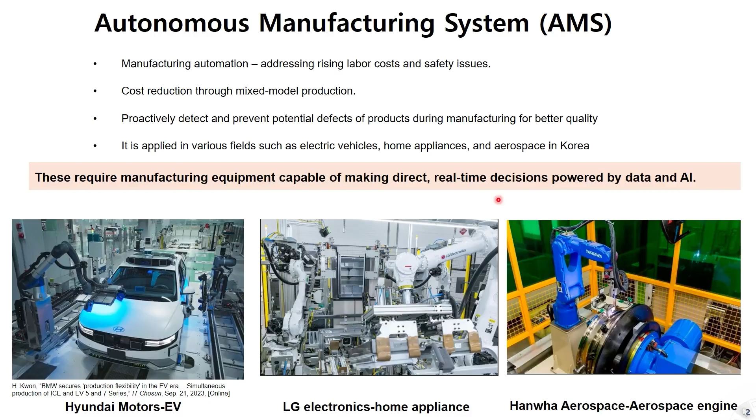Before going into details, I would like to briefly discuss the difference between a smart factory and autonomous manufacturing. Of course, depending on how we define each system, this discussion can vary slightly, but I will take a general perspective here. Both systems are similar in that they make decisions based on data and automate manufacturing processes. However, the key difference lies in who makes the decision. In smart factory, decisions are made by humans based on data, whereas in autonomous manufacturing, decisions are made automatically by machines or the system itself.

The important point here is that humans find it difficult to form a complete closed loop between data and machine control. However, if the system itself can make decisions directly, it becomes possible to realize a self-governing production system with closed-loop decision and execution. This theoretically enables a faster and more efficient system, although implementing it in practice is highly challenging.

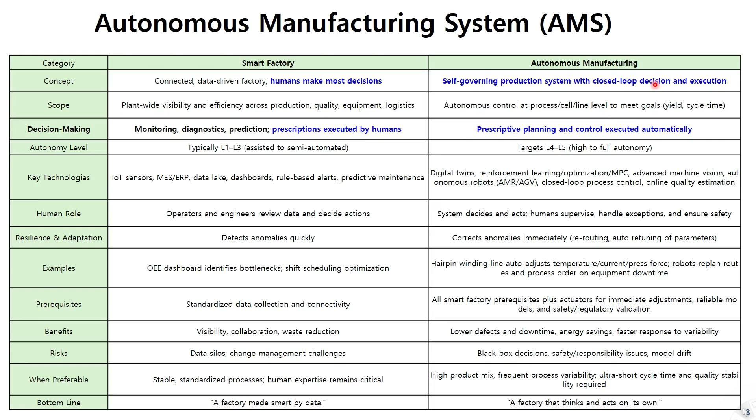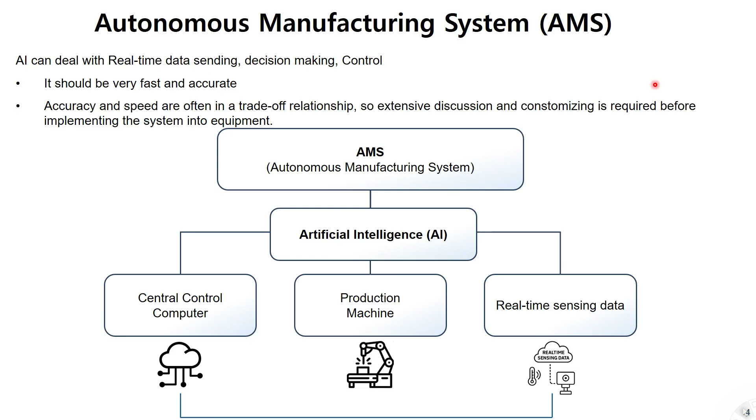However, in general, there exists a trade-off between the accuracy and speed of AI models. Thus, deep analysis and customization of these models are required for each process implementation. In our lab, we have been studying the application of autonomous manufacturing technologies in industries such as automotive, home appliance, and battery manufacturing.

Today's talk is focused on EV traction motors. Among the many components of an EV, the traction motor requires a high degree of customization to meet performance and demand. Various design optimization strategies are already available through simulation tools; however, in manufacturing, it is often difficult to realize these designs because of process constraints. A flexible manufacturing approach is therefore necessary to bridge this gap between optimal design and practical production.

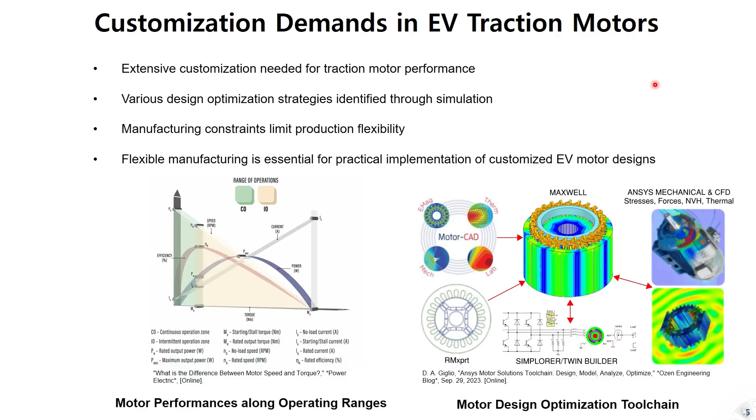EV traction motors commonly use U-shaped hairpin coils, which are made by forming flat copper wires. The coil manufacturing consists of processes such as wire straightening, stripping, cutting, bending, and assembly. I think many of you are not familiar with EV motor manufacturing.

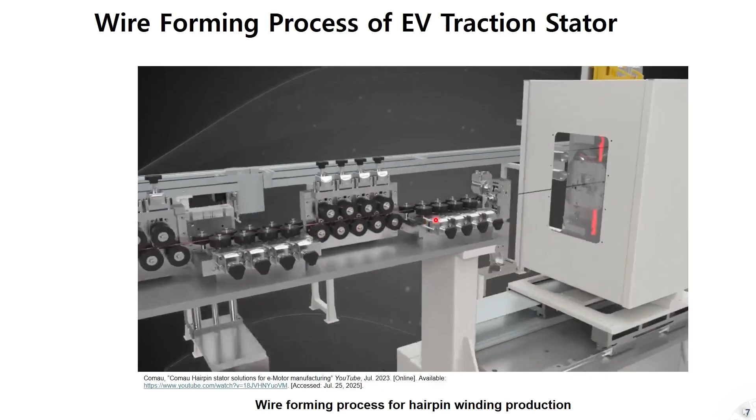I prepared a short animation. This is the straightening, stripping, cutting, moving into the bending machine.

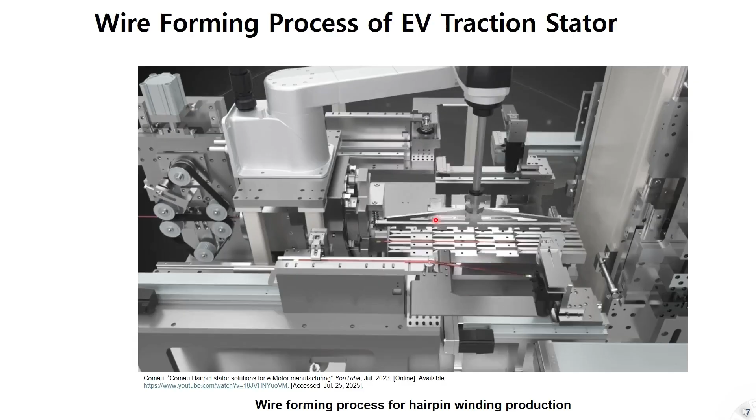This is the bending process. Inserting here, and then finally welding.

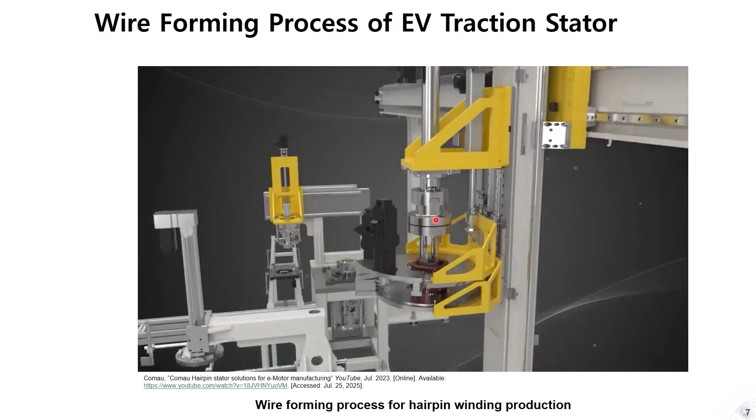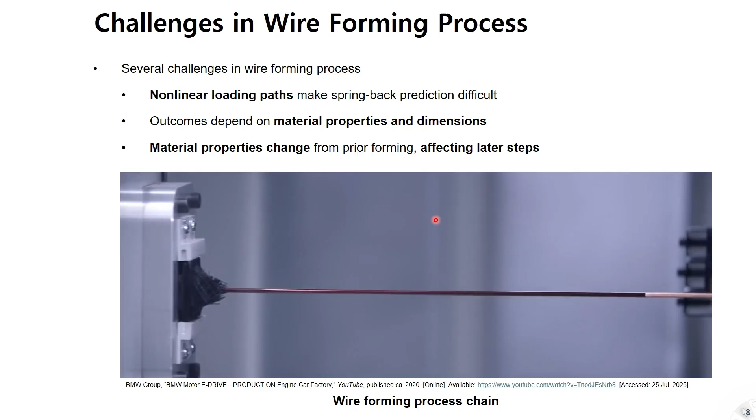There are several challenges in wire forming. First, the loading paths are non-linear, which makes it difficult to predict spring back. You can think of this as similar to bending a paper clip. When you bend it, it doesn't stay exactly in the bent shape, but slightly returns, the spring back.

The same phenomenon occurs in hairpin coil. After forming, they tend to spring back, making it difficult to maintain the intended shape required for insertion into the stator. Second, the results depend on both material properties and wire dimensions. Third, these material properties even change during the forming due to plastic deformation. All these factors increase the complexity of controlling the process line in real time.

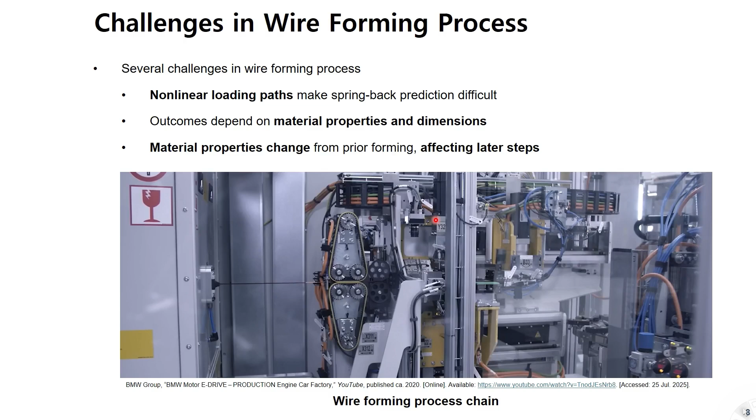Today we are focusing on this straightening line. Of course, our lab is doing all the processes, but due to the time limit, we will focus on the straightening process in this topic.

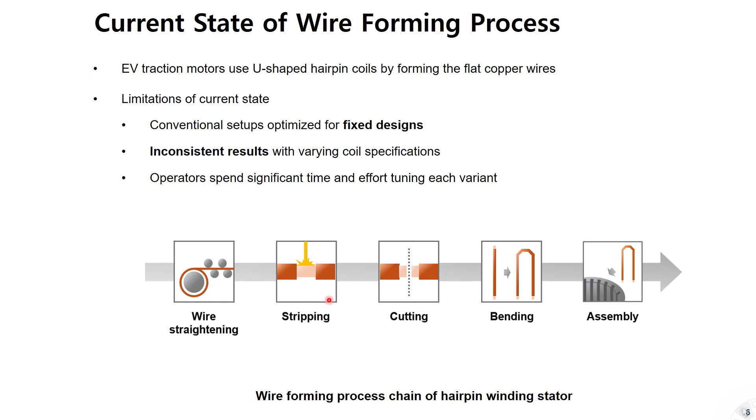To overcome these issues, we need a flexible manufacturing approach like this. So the autonomous manufacturing system for the EV motor consists of three key components. First, sensors like here measure real-time changes in both dimensions and material properties of the wire.

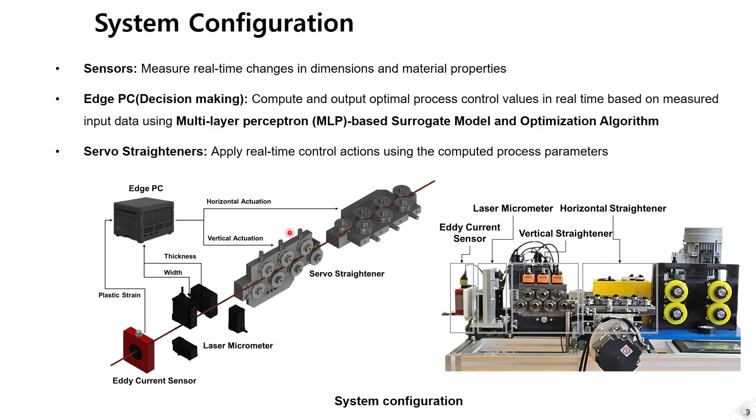Second, this edge PC processes this input data and computes the optimal process control parameters using an MLP-based surrogate model, along with some optimization algorithm. Finally, the servo straighteners are here. They apply real-time control actions based on these computed parameters.

The sensor systems measure two important input variables: dimensions and material properties. This set will measure the thickness of the wire. This set will measure the width of the wire. And we also made this eddy current probe, which will measure material properties in real time.

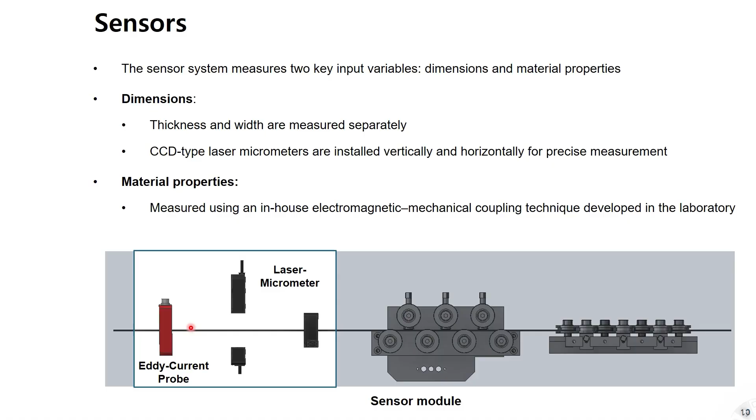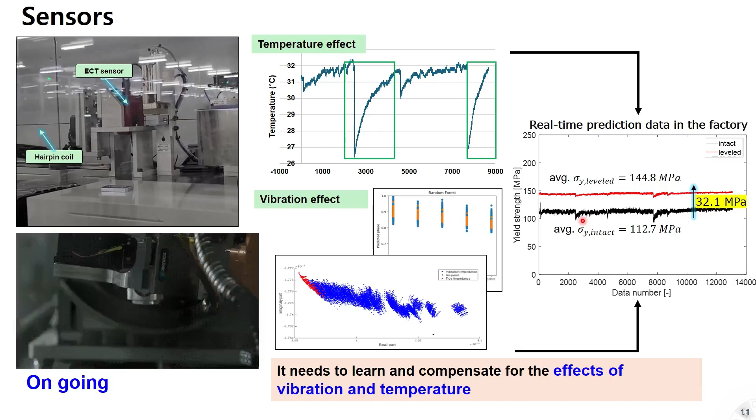I'll be talking about it in later slides. And this is the straightening.

This is a servo system that controls the displacement of each roller using servo motors. This one is a very traditional thing. As I told you, if this cannot make a closed loop control system, traditionally if you face some quality issue in your product, you stop your line, then some people go into the machine and make manual screw adjustments like this way.

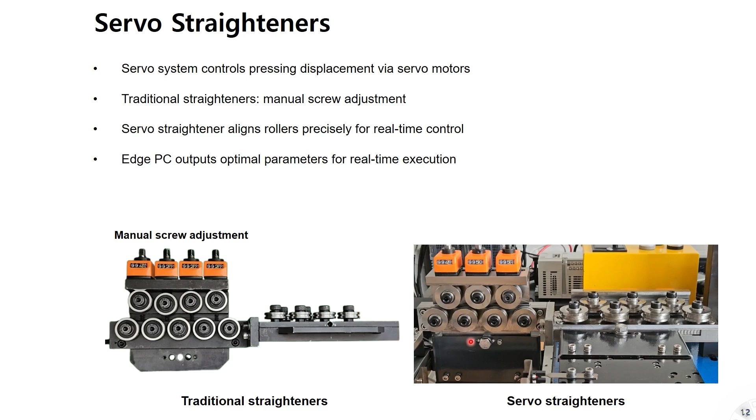Then after this adjustment, you return your line, then you check your quality. This is not closed loop, this is open loop. But if you use this kind of system, it measures material properties and makes direct decisions with real-time feedback, and then the servo straightener makes real-time control, so we can make a real closed loop autonomous manufacturing system.

And also we need to talk about how we made the model. So we use two kinds of strategies. The first group is physical experiment, and the second data group is gathered by FEM simulation. These two categories each have some advantages and disadvantages.

Physical experiment can consider very specific environments like roll, friction or other things, but it will make a lot of noise and have some outliers. FEM simulation cannot consider very specific environments, but it does not have noise or outliers. The data is very stable because it follows some governing equations based on physics laws, so this FEM simulation data is much less expensive, so we can gather more data and combine these two categories.

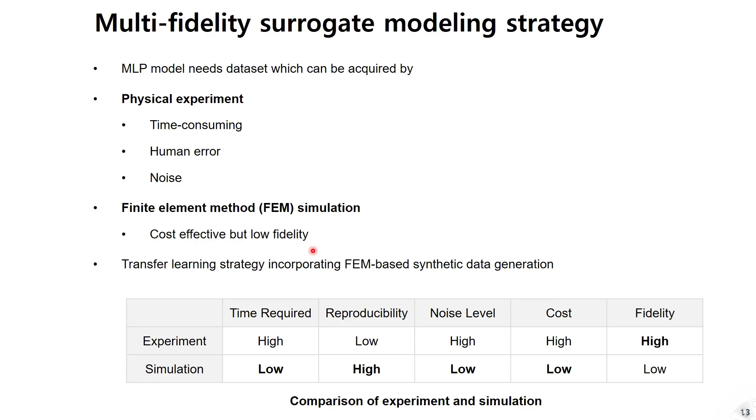This is the outline of our work, how we made the model. First, offline, we gathered a lot of data from the simulation, and this simulation gives us a stable, large amount of data. Then we first made a pre-trained MLP model based on a surrogate model, and this one is supervised learning. But after we made this first pre-trained model, we implemented it into the real machines, and then we gathered real-time sensing data.

But as I told you, this simulation does not include a very specific manufacturing environment, so the sensing data includes a lot of very specific manufacturing environment. So we need to do some transfer learning, like a fine-tuning method, and after that we made the second fine-tuned model. Then we implement the final model into the machine.

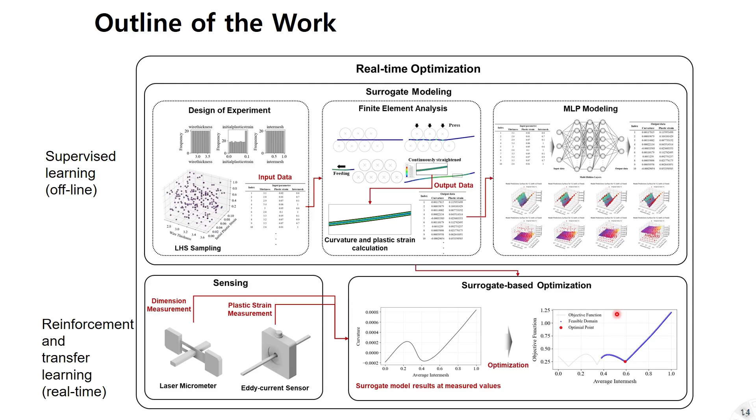And this is the synthetic data generation. We gathered our data from the FEM simulation. We did Latin hypercube sampling, and gathered 400 random samples with different thickness, width, and initial plastic strain. Our first pre-trained MLP-based model was trained to predict curvature and plastic strain.

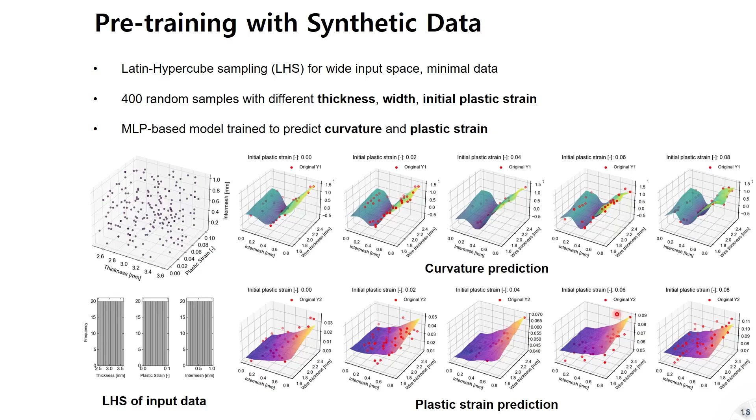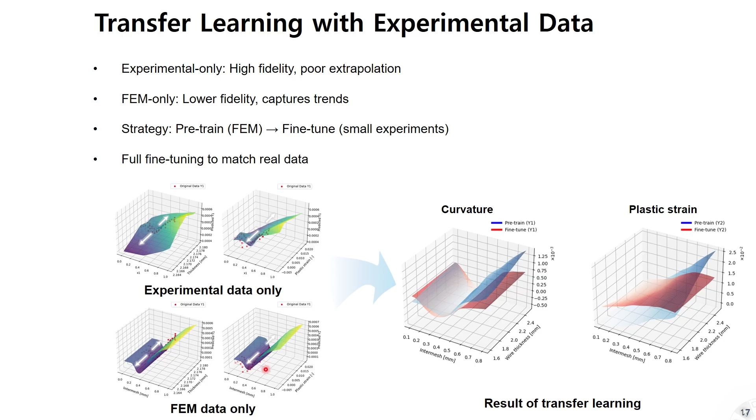So we implemented this into the machine, but the real-time experimental data includes more specific manufacturing environment, so we need to do some fine-tuning, transfer learning like this. So this one is the FEM model, and we did some fine-tuning with some experimental data, so we finally get this model.

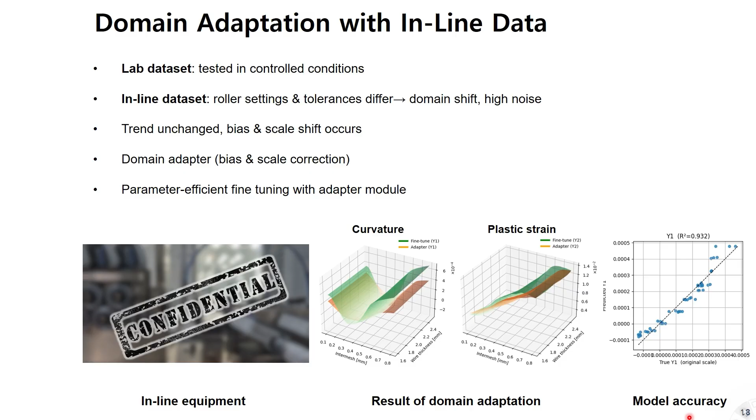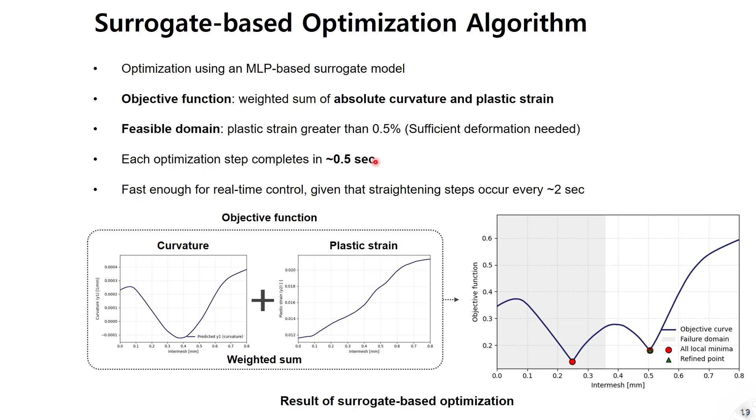Okay, so I'm going to show you this video to show you our system.

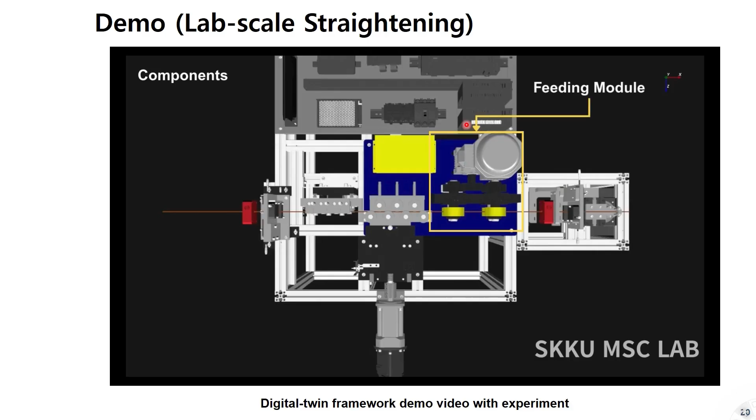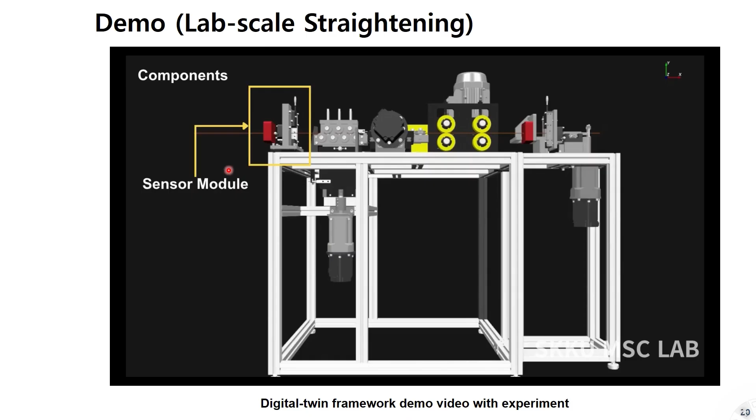This one is the control panel and feeding module, horizontal servo motor here, vertical servo motor here, and this one is the sensor module. We made a digital twin here, so if you look here, this sensing data is real-time sensing data. This is the real-time visualization in our digital twin.

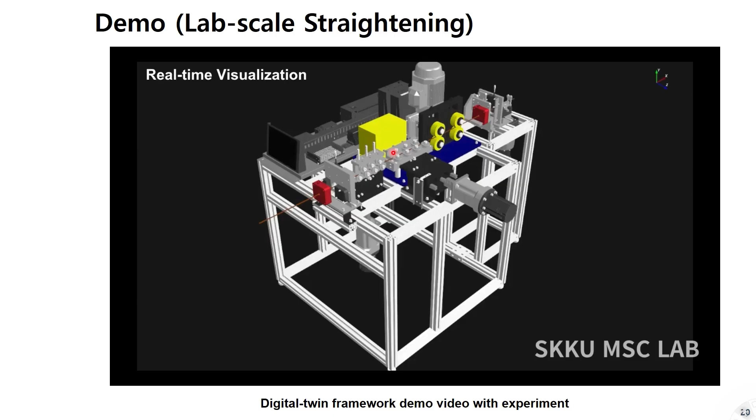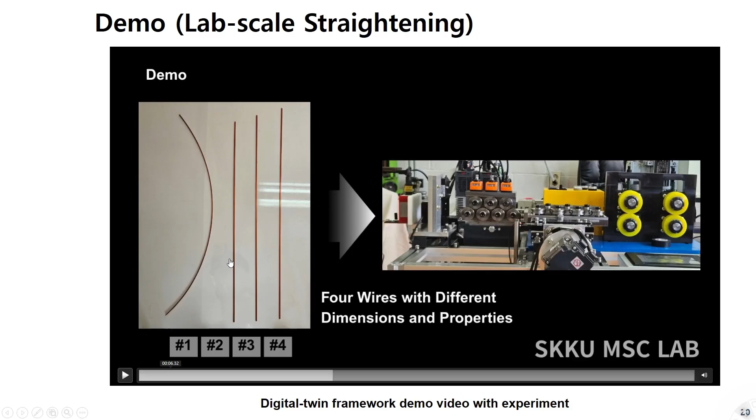And also in this video I'm going to show you, we tried to make some flattening of 4 different coils with different curvature. Specimens 1, 2, 3, and 4 have different thickness, different width, different material properties. We tried with 4 different specimens.

The first specimen is here. This one measures material property and dimensions, and you can see these rollers are moving. This is not clear, so if you look upside here, you can see the digital twin will show you real-time movement of the roller.

The first specimen is here, then we insert the second specimen, with different material dimensions, and you can see it moving, measuring the dimension and property. It is moving like this, so that's the second specimen, and we insert the third one, and you can see it measuring again, moving again.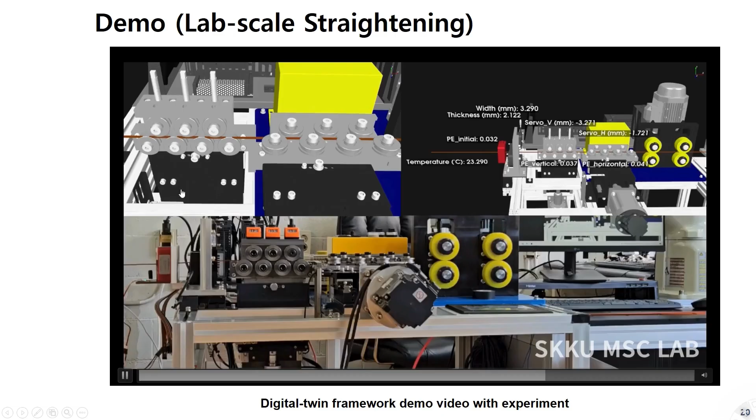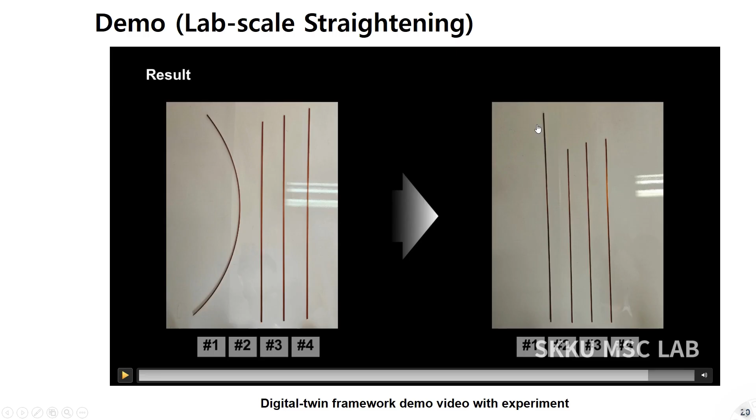We finally did 4 specimens. You can see here, even with different dimensions, properties, and curvature, we finally got very flat wires like here. So we applied our technology into the wire straightening process.

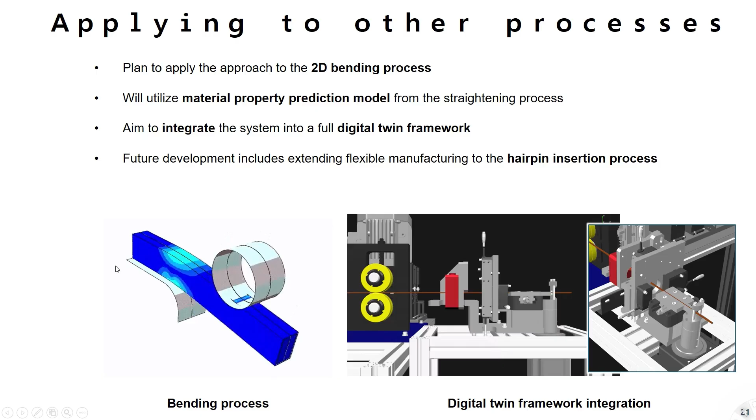After that we are applying this technology into bending, and also doing all the manufacturing processes of the motor. Thank you for listening to my presentation. Thank you.